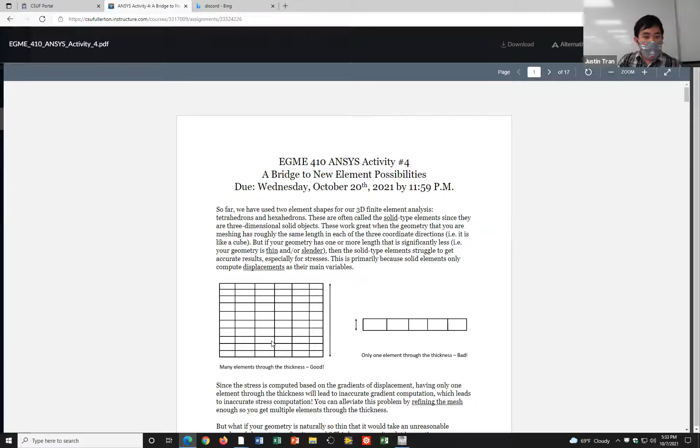Okay, so the activity today is called a bridge to new element possibilities. Basically we're going to take this CAD model right here, which I took straight from GrabCAD, so credit to that user for providing it. It's a perfect example for this activity because there are a lot of geometries here that we can turn into shells and beams. You'll see a lot of slender, thin geometries that will benefit from transforming into shells and beams. But it's also not the cleanest geometry in the world, so you'll see a lot of the extra cleanup operations that you typically have to do when working with shells and beams in practice.

If you haven't already, go ahead and open up Ansys and import the model. Remember, you right click on geometry, import, and then click on bridge.igs.

Contrary to our previous activities, instead of spending most of our time in Ansys Mechanical, we're actually going to be spending a lot more time today in Spaceclaim, which is the CAD software that comes along with Ansys. If you double click on geometry, even though there's a green check mark, it should open Spaceclaim by default. But just to make sure, I usually like to right click and then click on edit geometry in Spaceclaim. It takes a little bit of time to start up, so I'm going to go ahead and start that process now.

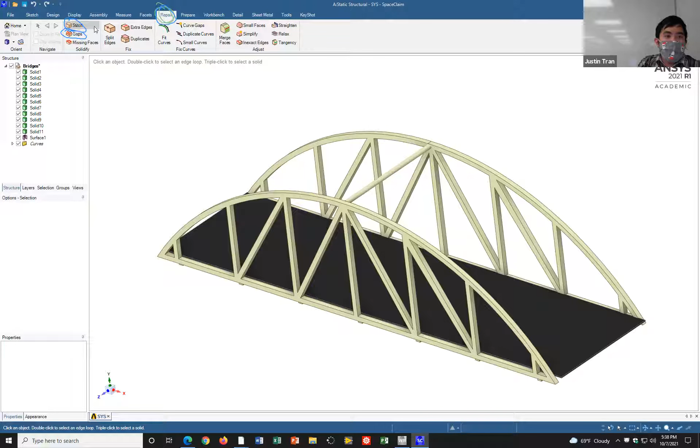After you click that button, Ansys is going to try to find some locations in the model where it can stitch things together. In this particular case, we have a notification that says no areas found. But if it did find some areas, this green check mark would light up. Right now it's grayed out because it couldn't find anything, but if it did find something, you would just click it, and Ansys would automatically fix those areas for you.

We're going to do the same thing with gaps. Let's go ahead and click on gaps. After you click gaps, you can see that Spaceclaim was able to find one area, highlighted in red. To fix that area, you can click on this green check mark, and usually that'll fix any gaps it finds in the model.

But for this particular model, and I haven't quite figured out why, it's here on this side but not on the other side. It can't actually fix this gap, at least not with the automated tools. We'll fix this later when we get into mechanical, but for now the automated system was not able to fix it. Normally when you click gaps and click OK, it'll fix some gaps for you, but for this particular case it doesn't work.

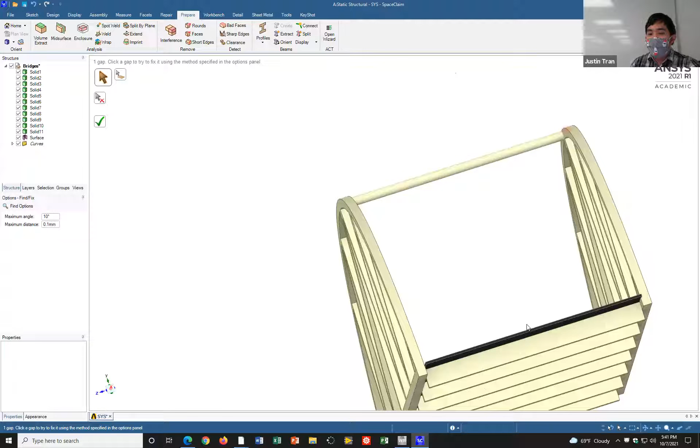That's a very clear, textbook place where we can insert a shell element. The other two places where we can put shells are on the sides of the bridge. If you look at the sides, we have this archway, but it's so thin in this dimension that it's going to be good to put a shell.

To create a shell, we're going to go to this tab right here called Prepare, at the very top of the screen. And then the tool for creating mid-surfaces is right here. For some reason it grays out when I'm outside the window. So I'm going to click on mid-surface.

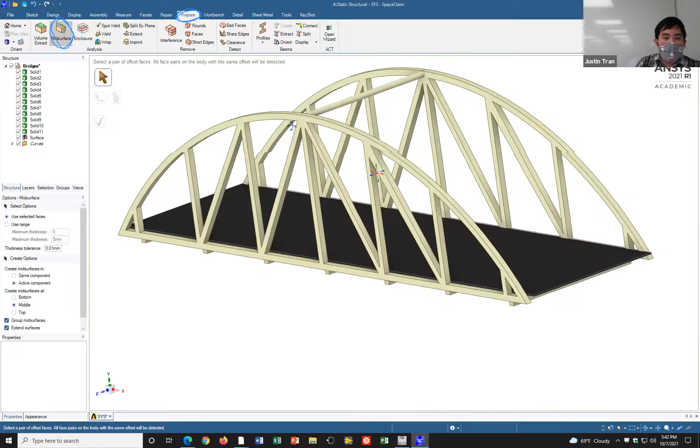The way it works is you simply just have to click both surfaces that are parallel to each other. Let me start with the side of the bridge. I'm going to click on this surface right here, and after you click that surface, you'll see that it kind of disappears. Then you're going to click on the other side, the parallel side. If both sides are sufficiently parallel and close enough, they'll be highlighted in blue and green.

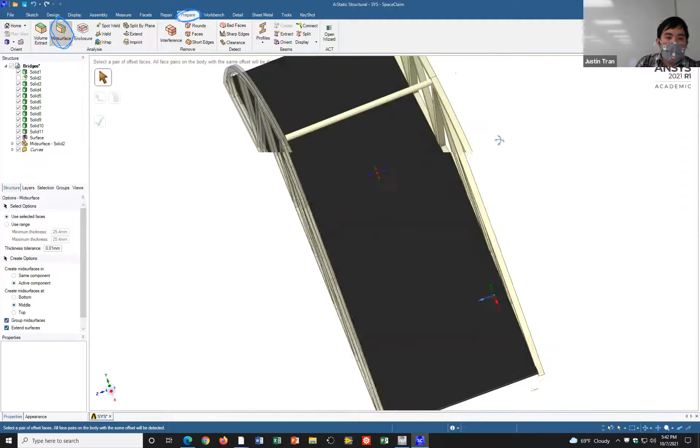Once you do that, you can go ahead and click on this green check mark, and then you can see that the mid-surface operation was created. The old three-dimensional object here is kind of grayed out now, kind of transparent, and in its place we have this thin shell geometry. If you want to get rid of the transparent ones, just click anywhere within the window, and now instead of that three-dimensional object, we have this paper-thin shell element.

So is everyone able to get a shell element from that side of the bridge? I'm not getting it to select—I'm clicking on it, but it's not working. Did you activate the mid-surface operator here? Let me check real quick.

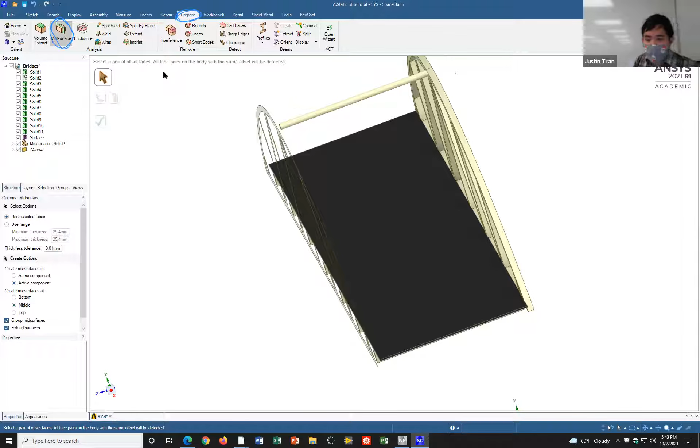For the rest of you, go ahead and create mid-surfaces for the other two. Go ahead and do it for the other side of the bridge and for the road as well. You should have three shells at the end of this.

You'll go and then you need to click the other side. No, the other side of the same surface. You click on the inner side here, and then you're going to click on the outer. Now that makes no sense. Yeah, I thought it was on either side. Yeah, because if you try to click those two, I think it says it's too far apart.

Yep, go ahead, check mark. Same thing, yep, the other side. Yep, thank you very much.

How would you deselect in case you accidentally select something? If you want to deselect, I think the easiest thing is just to choose a different tool up here. Go ahead and click like volume extract and then come back to mid surface, and then you can go ahead and click that again.

Yes, yes, do the road too. Yeah, so let me go ahead and do this really quick.

After creating your 3 shells, it should look like this. The nice thing is that after you create shells, it makes them transparent, and that helps to emphasize the fact that you have shells instead of solid parts.

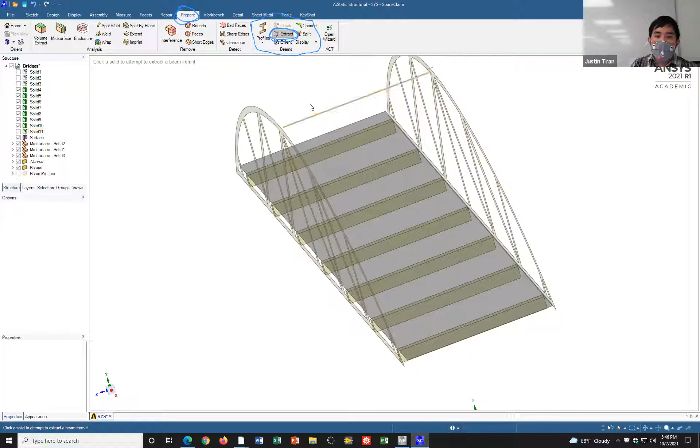I'm going to click on this Extract tool. The way this works is you simply point your mouse at a beam geometry, a slender geometry, and then click. Once you click, you can see it replaces the beam with a line. We're going to do that for the top supporting beam, and for all of the beams on the bottom as well.

I don't know why I'm lagging like crazy. All right, let's go ahead and extract all of these parts here. That actually made it lag less. And with that, we've successfully made shells and beams.

So, is everyone able to extract the beams from the different parts of the bridge? All right, looks good, right? Seems like we're done.

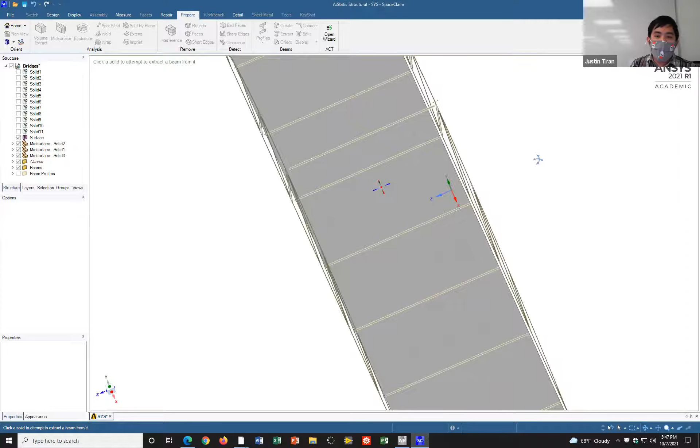Unfortunately, we're not. This is where things get more annoying than anything. If you zoom into the places where we extracted stuff, let's take this top beam for instance. I'm trying to get it to an angle which makes it more clear.

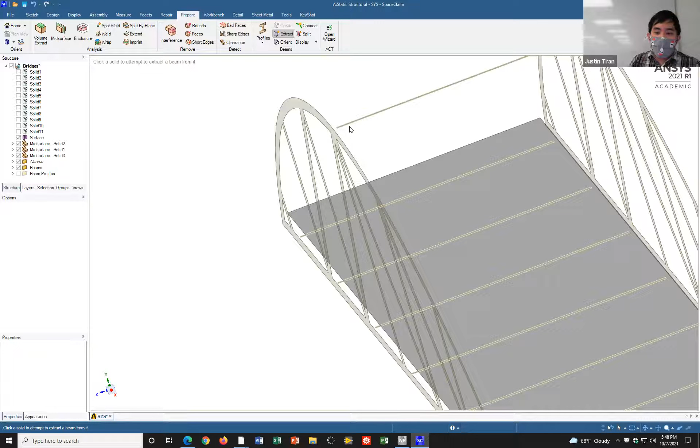This top beam's purpose is to support this top part of the bridge, to make sure it doesn't crumple in on itself. In order to do that, it has to successfully make contact with the bridge to support it. But you can see here, by doing our mid surface and beam extraction, we're no longer making contact here. We have this little gap where the beam should end and where the side of the bridge should be.

This isn't good, because if we take this into Ansys Mechanical right now and try to run a simulation, this beam is going to be floating in no man's land because it's not attached to anything—it's really just floating in the air. So we need to clean up this geometry to make sure that all the parts that should be connecting are still connecting.

If we went into Repair and clicked on Gaps, would it tell us those gaps are there? We're going to use a different tool for that, because Gaps is something that works strictly for 3-dimensional CAD models. This one is going to work for shells and beams instead.

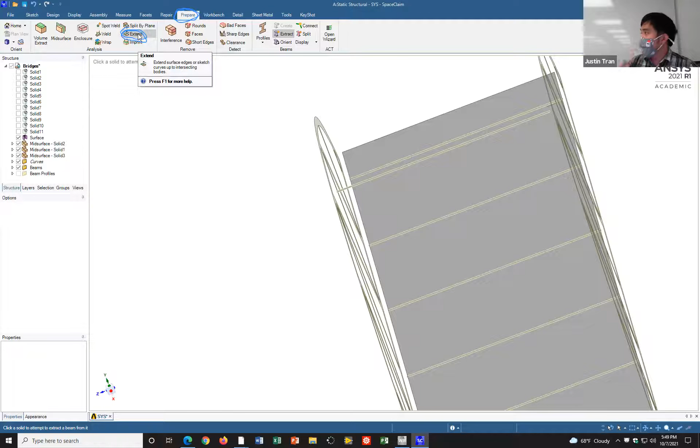The next tool we're going to use is within Prepare, and it's called Extend. It's the same concept, but instead of gaps, it's called Extend. If you read the tooltip for Extend, you can see this tool is going to extend surface edges or sketch curves up to intersecting bodies. This is going to help us alleviate those gaps.

So let's go ahead and click Extend. But unfortunately, after we click Extend, it didn't find any areas we can extend to. The reason is that right now, Ansys is only looking for gaps smaller than 10 millimeters. If you look at the left side of the screen, you can see the settings for the Extend tool. Unfortunately, the gaps we have here are actually bigger than 10 millimeters, so we need to increase that tolerance a bit. The tolerance I used for this activity was 50 millimeters.

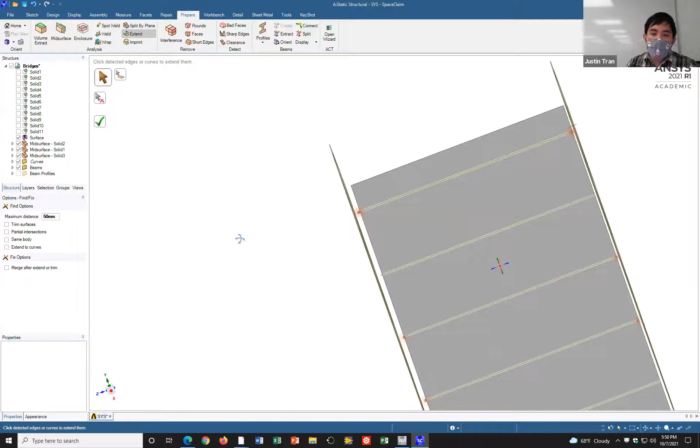After you change the tolerance to 50 millimeters, you can see that it's identified all these areas where the beams are not connecting where they should be. The nice thing about this is that you can just go ahead and click the green check mark, though you might have to click it a couple times. After you click it, you can see that it fixed not all of the beams, but some of them, making them intersect with the bridge as they should.

So is everyone able to extend the beams? Okay, that worked for some of the beams, but it didn't work for all of the beams. So just to make it a little bit easier to see, I'm going to hide the road for a second.

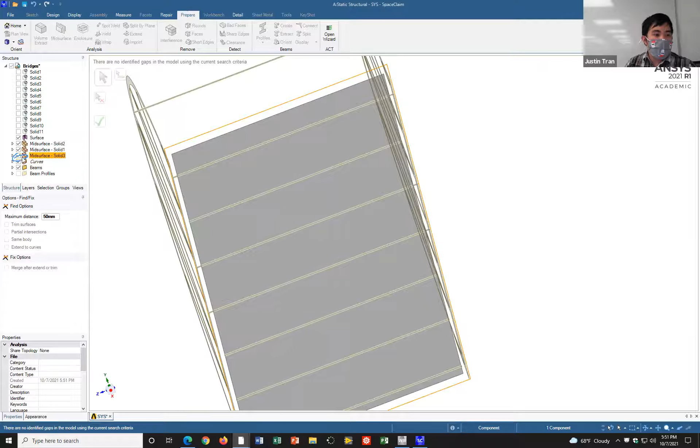If you did your shells in the same order as me, then your road should be solid 3. I'm just going to click on this check mark next to solid 3 right here, just to turn it off for now, because it'll make it easier to see. The road's still there, I just hid it from view so we can see this better.

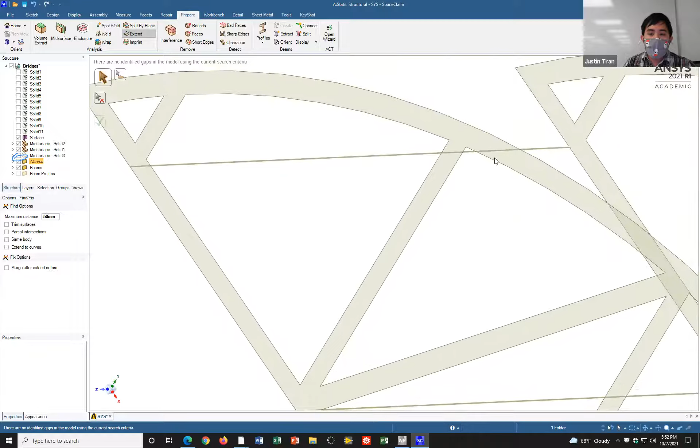Let's go ahead and look at some of the beams on the bottom, and see which ones are connecting or not. If we look at this beam right here up top, you can see that it was successfully extended to hit the bridge. But this beam was not.

If you look at this beam right here, we have a little bit of a gap between the beam and the bridge. This was not able to successfully extend, and you might be wondering why, because it looks like it should be the same as the other ones.

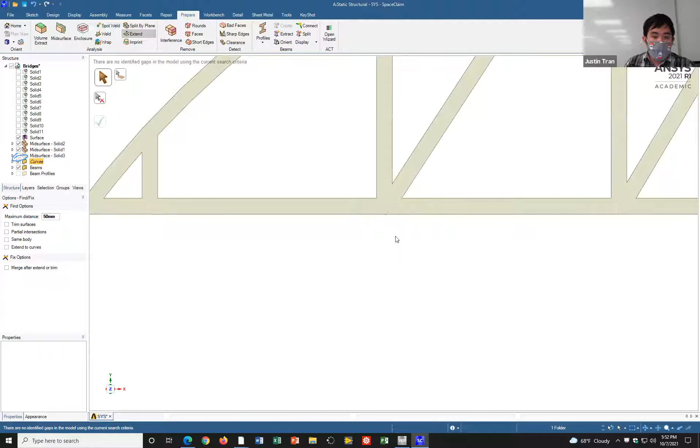The reason it couldn't extend is that it's not even within the plane of the bridge to begin with. I think that's easiest to see if you go down to the XY axes here and click on Z, the blue one. It'll kind of flip me around, but okay.

If we look at this beam right here and zoom in as much as possible, you can see that this beam is actually underneath the bridge. There's a vertical gap between these two points right here. So when we asked Ansys to extend these beams, it tried to extend as far as it could in this direction, but it wasn't able to find any intersecting solid, so it just did nothing. But that's not good, because we still need this to intersect with this. We need to clean this up a little bit more.

The way we're going to do that is we're going to start—let me zoom out a bit because I'm going crazy—we're going to move it vertically upwards, in the vertical Y direction, just enough so that it's within the plane of the bridge. Then we're going to use the extend tool again in order to fully extend this to the sides of the bridge.

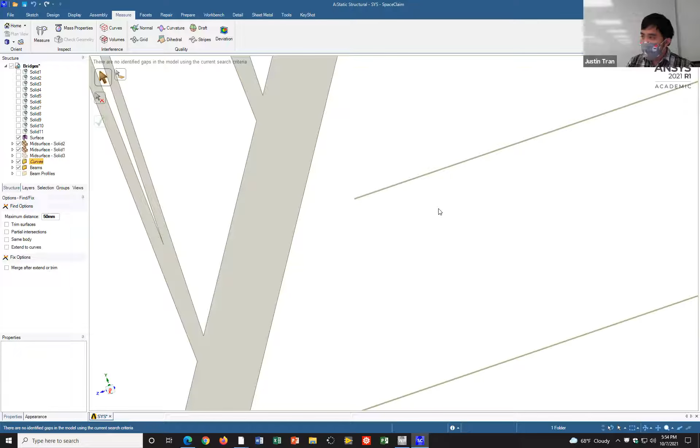Are there any questions on that? Does that make sense why we weren't able to extend this beam down here? Quick question—are you saying that it's not connected to the lower part of the side, the beams on the side? Yeah, yeah, that whole display. Yeah, and so the problem is that it's actually below it.

Let me do this on Z again. The problem with this, and the reason why we couldn't extend this to the side of the bridge, is that it's not even in line with the bridge edge itself. So what we need to do is move this beam upwards in the Y direction such that it is actually in line with the bridge, and then we can successfully extend it.

All right, so this part is actually going to take place in a few different steps. The first thing we need to do is measure how far off the beam is from the edge. We're going to need to do this individually for all 4 of the beams that are still not connected yet, because when we measure them, you'll see that the amount they're off is different.

Remember when I told you that this CAD model wasn't the cleanest thing in the world? This is the reason for it. So first we're going to measure the vertical Y distance that we're off, and then after we measure that, we're going to move this beam upwards by basically the exact amount.

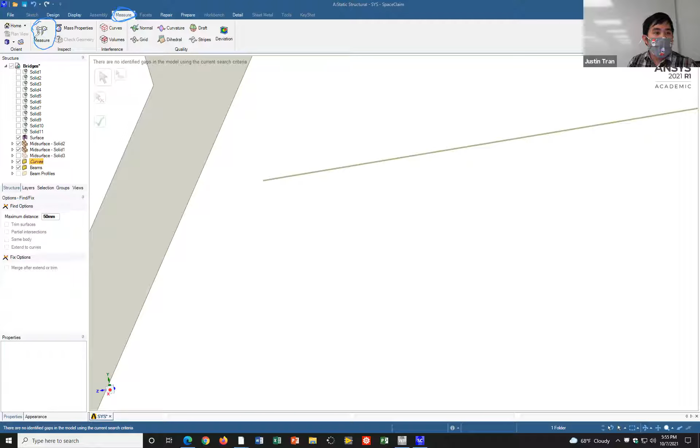We're going to go into the measure tool right here. This tool is going to let us measure different parts of the geometry. Specifically, you're going to click on this tool called measure. After you click on measure, the options menu on the left is going to change. One thing you need to make sure of is that the option for show XYZ vectors is enabled, because all we want is the vertical Y distance between the beam and the bottom of the bridge.

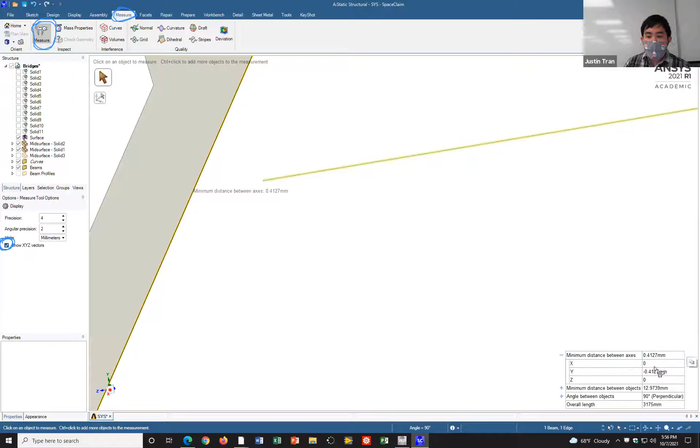The way this is going to work is we're going to first click on the beam itself. You can see the length of the beam, and then you're going to hold Control on your keyboard, and then click on the bottom edge of the bridge. If you do that right, you should see this window pop up, which shows the Y distance between the beam and the bottom of the bridge.

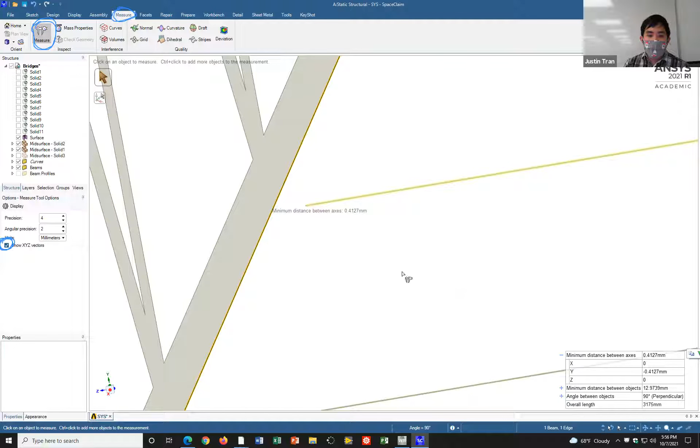For this particular beam that I selected, the distance between the two is 0.4127 millimeters. If you guys chose a different beam to look at, your distance might be different, but the one that I ended up picking was 0.4127.

So was everyone able to measure that distance? Okay.

Now that we have this number, let's go ahead and write it down. I have the gift of Zoom, so I'm going to go ahead and just write it on the screen. But you can use your notebooks or whatever — just don't Sharpie onto your computer screens.

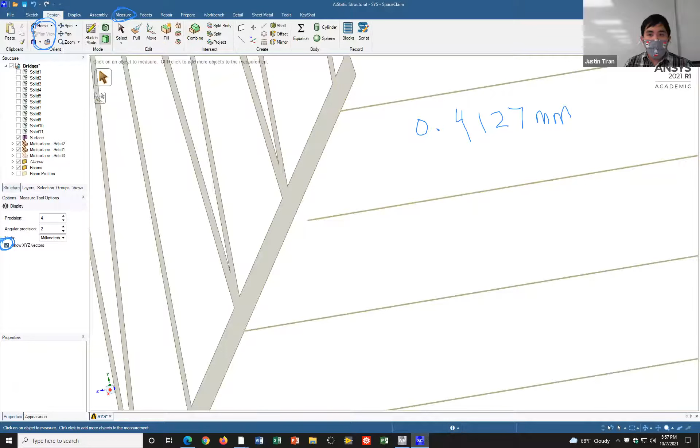All right, so I'm going to click away just to make sure we're deselected. From here we're going to go to design — actually, let me clear these first. Okay, we're going to go to design up here.

Okay, so we're going to click on move right here. If you read the tooltip for move, this basically lets you select an object and you can move it or translate it in X, Y, Z in space. So with the move tool selected, we're going to click on the beam.

After you click on the beam, you'll see several arrows and rotation tools show up. You're going to want to click on the blue arrow — make sure you're clicking on the blue arrowhead. After you click that, you can click and drag, and you can see that you can move the beam up and down.

It's really hard to click and drag this to the exact number that you want. So what I do is I just click and drag it up a little bit, just to get this number thing to show up, and then I manually input the amount that I want to move it up by.

And so it helps a little bit to round up, because we basically want to move this up enough until it intersects with the bridge. Okay, all right.

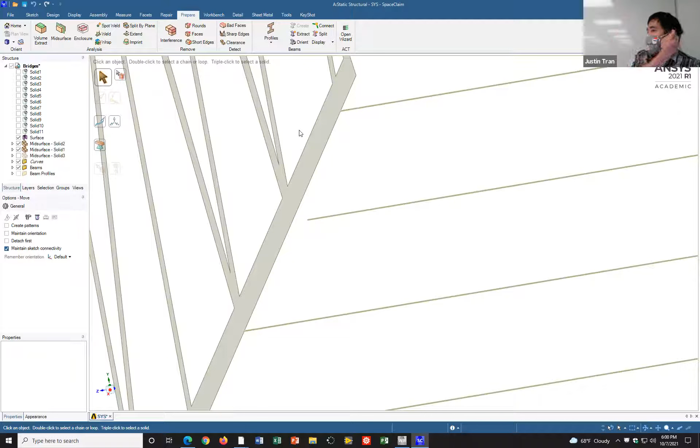All right, so was everyone able to move the beam up by that amount? All right, I'm gonna do one more step, and then I'm gonna go walk around a little bit, because I think this is the part where I usually start to lose people.

Okay, and so now that we've moved the beam upwards, we can go ahead and extend it now. If you go back to the Prepare tab, and then go to Extend right here. Remember before when we clicked this, it wasn't able to fix this beam because it couldn't extend it and couldn't hit the bridge from the side. But now you'll see that when you click Extend, it found two areas, right? And those two areas are on the beam that we just moved up. So we go ahead and click OK.

And so now our beam is successfully intersecting with the bridge. Okay.

Yeah, so the amount that you measure depends on which beam you selected. One of the beams I know is 1.9221 millimeters down, so I think you just selected a different one than I did, and that's totally fine. So you want to move that beam upwards 1.9221. Yeah, so all the beams that are off right now are off by a different amount, so make sure you're measuring for each of these beams, okay?

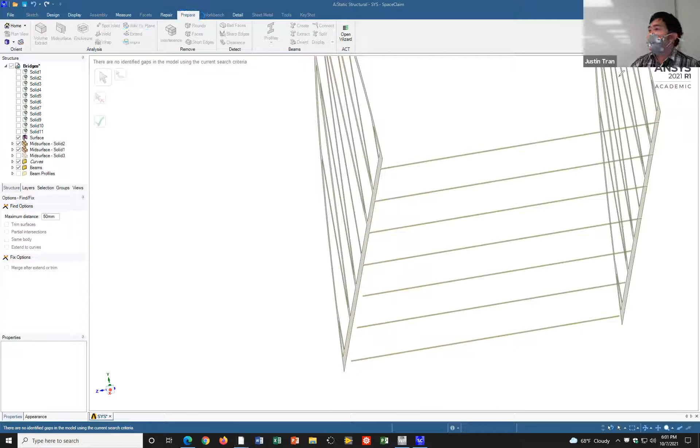I tried it, but it's not extending, so there's nothing to extend still. Okay, so let's go from the beginning, let's go to measure. Oh it looks, yeah, all right, let's measure that one just to make sure. Let's go ahead and measure.

Oh, it's not — oh, there. You have to hold control. Oh, it's so close. You see, moved up just a smidge more.

But be careful here, because you're selecting both, so go ahead and click out for a second, and now try to make sure you're selecting the entire beam. I had issues yesterday where people had both the beam and the bridge selected, and they moved both at the same time. That's that thing I was just doing right there.

How do I do that? You can go ahead and hit the undo button here.

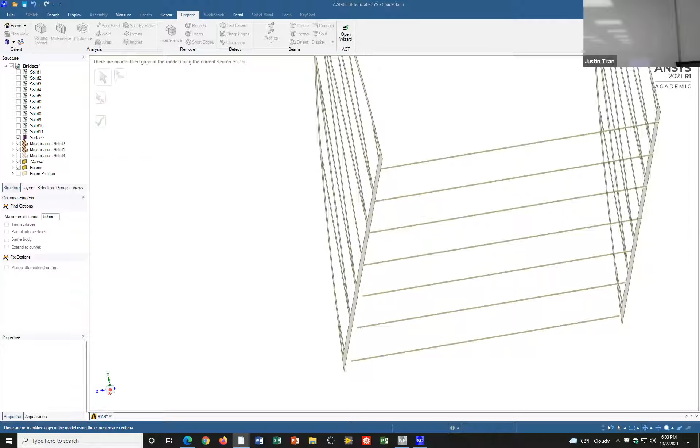Yeah, so the floor, I just hid it for now, so I clicked on this check mark here. We'll deal with the road in a bit, but for now I just want everyone to make sure all the beams are connecting to the bridge.

Did you hit the extend tool? Like they're not exactly at the bottom. Oh, that's that, it should be. Go ahead and rotate it. Yeah, so that one we have to move up for.

Can you see? Let me try doing that and extend. Okay, so it extended everything, so those ones that are inside it should be connected.

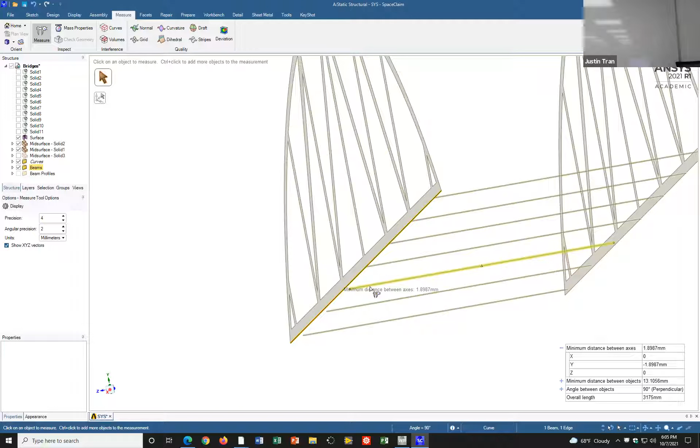Okay, this one — there should be 4 of them on the bottom, that one, and then 3 on the end. Oh nice, yeah, control 8, that's good.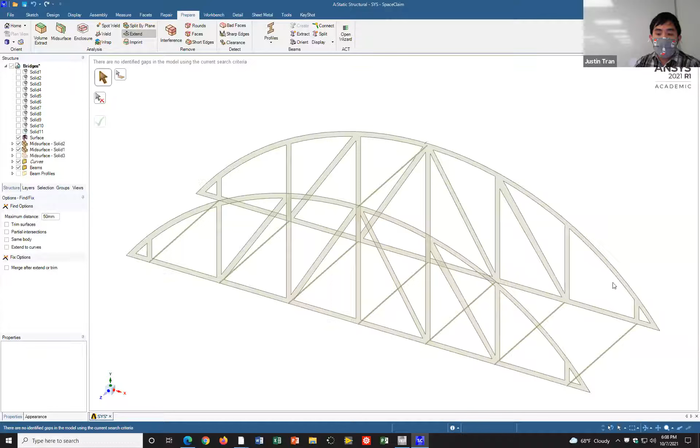The part we're going to do next together is basically the same thing for the road. We need to move the road down a little bit to make sure it's in line with the bottom of the bridge, using the same measure operations as before, and then do an extend to make sure they make contact. Go ahead and start working on that if you've extended the beams.

Does it matter how high up you move the beams? You want them to all be pretty close, because the next step once we get into mechanical is we're going to bond the road to all of the beams on the bottom. If they're not level with each other, it might not bond successfully, so you want them all pretty close. I don't know the exact tolerance within Ansys, but they should be within at least 1 decimal, like 0.1 millimeter, I'd say.

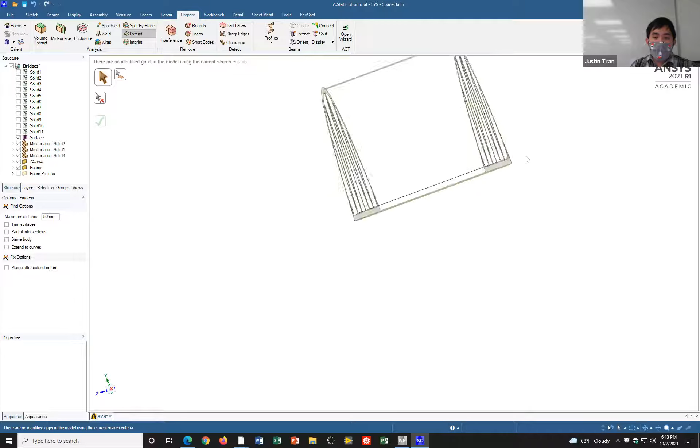Just like we did with the beams, we need to measure the vertical distance between the road and the beams. So we're going to go back to measure, and make sure you have show XYZ vectors enabled. I'm going to click on the road.

Then I'm going to hold control on my keyboard just like I did for the beams, and click on, in my case, the bottom edge of the bridge, because that's what we want to line it up with. You can see here that the y distance we need to travel is about 28.37 — that's the vertical distance between them.

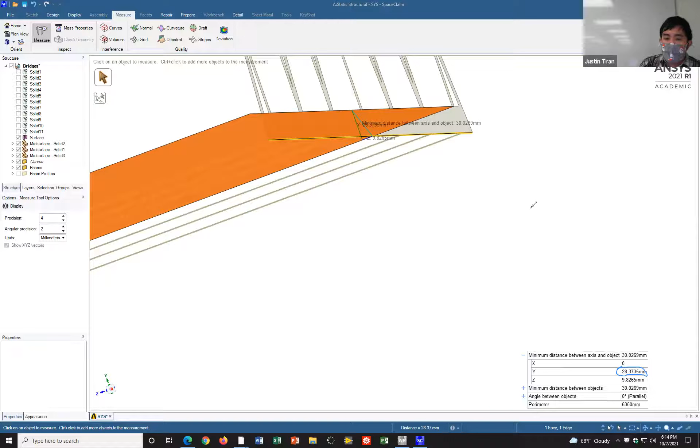We're going to move this road downwards by this amount, but this time we're going to stop a little bit short and round this one down. Because if we move the road too far down, say 28.38, then the road is going to be suddenly underneath the bridge, which is not what we want. So in this case, I'm only going to move it down 28.37.

All right, let's go back into design here. Go ahead and click move. I'm going to click this entire road, and I'm going to move this downwards.

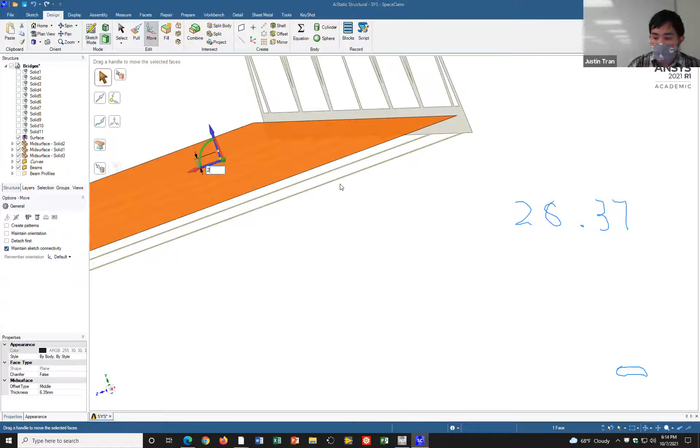I'm going to manually input the number, so 28.37, okay? And if you're doing that, you can see that the road is now basically right on top of all the beams. And then one last thing before we exit Spaceclaim is we want to extend, because right now we can see there's this gap between the road and the bridge.

But the road and the bridge should also be connected to each other. So we're going to go back to prepare, and then I'm going to click on extend. You can see now that I've clicked extend, there are two new areas that Spaceclaim wants to extend, which are the sides of the road. So I'm going to go ahead and click OK, and after I click OK, you can see the road has been extended.

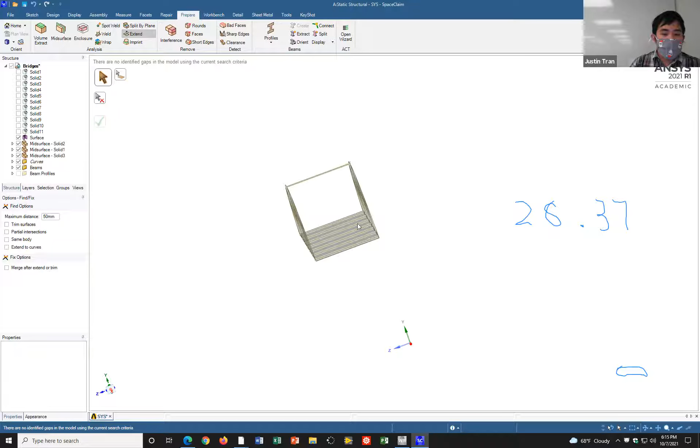So now everything is touching that should be touching. We have all the beams touching the sides of the bridge, the road is on top of all the supporting beams, and the road itself is connected with the side of the bridge as well. So by the end of the Spaceclaim part, you should have your shell and beam bridge looking something like this.

So were some people able to get to this point where you have the road kind of extended outwards? Doesn't matter if the road is like in between those bottom beams, midway. Because especially for the beams that we didn't move up ourselves, those are kind of upwards a little bit, and so there's going to be a little bit of play between them, but they just have to be close enough. The next step is we're basically going to be bonding those surfaces together, so at this point they're all going to be close enough such that they do that.

The road only acknowledges one point. Did you move down the entire road, or did you move down just one edge of the road? You want to make sure. Oh, and you might have accidentally moved up the bridge too, or moved down the bridge. If you did that, I would recommend that you hit the undo button here, because the move thing, once you've kind of gotten rid of it, it's kind of hard to track what you're doing. So I would hit undo until you get to a stable point, and then try to do the instructions over again.

All right, okay, so I'm going to go ahead and close out of Spaceclaim for now, and then we're going to open up Ansys Mechanical. But if you're still working on the Spaceclaim stuff, don't worry, I'll come back around to you.

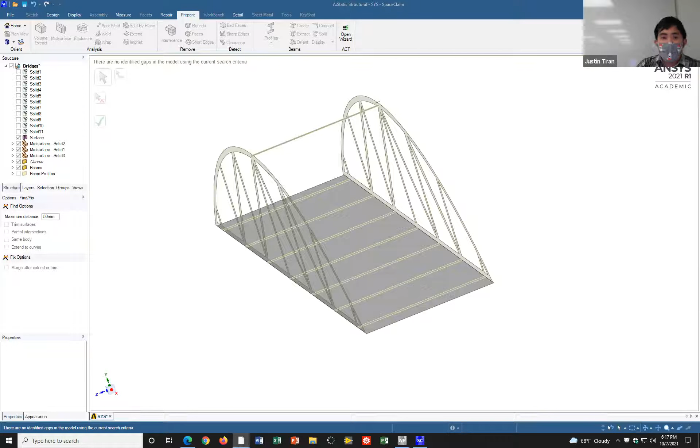But the next step is a little bit confusing, and I realized in the document I've hardly placed any images for this, so this is the part I want to make sure I go over today. Even if you don't see it, even if you can't follow along live, then you'll have the video to kind of help you out, because it is a little bit confusing.

All right, so I'm going to go ahead and close Spaceclaim. I said close Spaceclaim, okay, thank you. Okay, and then now I'm going to go back to Workbench, and I'm going to double click on Model. This is going to bring up Ansys Mechanical, which is where we're going to apply the meshing and the boundary conditions.

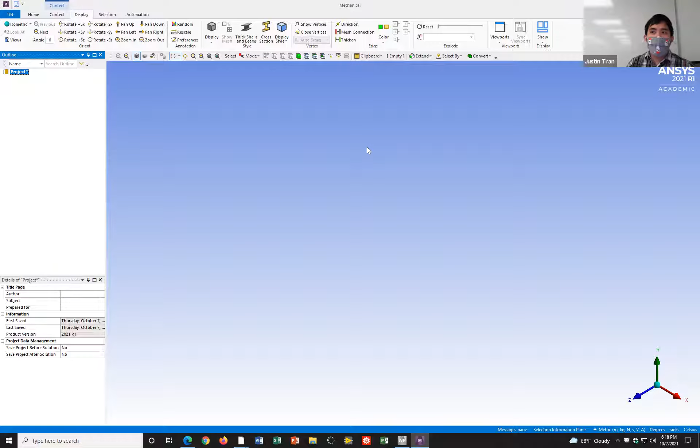Hey, Professor? Could you have all this open ahead of time and then edit one or edit the other, or do you have to open it fresh? I think it's best to open it fresh, because when you open up a new program, that's when it loads data from upstream. I don't think they update each other in real time. And if they did, I think it would slow down your computer pretty massively too, because it's trying to run so many programs at the same time. I've never tried it though, so if you want to try it and let me know how it goes, then. But that's kind of just how I understood it from before. Oh, I see.

Okay, all right, and so here we are in Ansys Mechanical, and so this is the interface that we've used before.

Okay, so first thing we're going to do is get rid of this weird twig chopstick thing that I still don't know what this is. If you look at the geometry subtree here, you can see it's the only part with a question mark. So we're just going to suppress it, because we don't need it in this simulation. Let's right click this and hit suppress. Okay, and then now our geometry is happy.

All right, and so from here you can see that we have quite a few parts in this assembly, way more than our signposts from before. We have 3 shells here and then 8 beams.

Which part did you suppress again? This one called sys/surface, yeah, it should be the only one with the question mark next to it.

Right, and so we have 11 different parts of the geometry, which is a lot. Okay, and so usually at this point you can start to go into mesh and apply your boundary conditions. Okay, but we have one problem here.

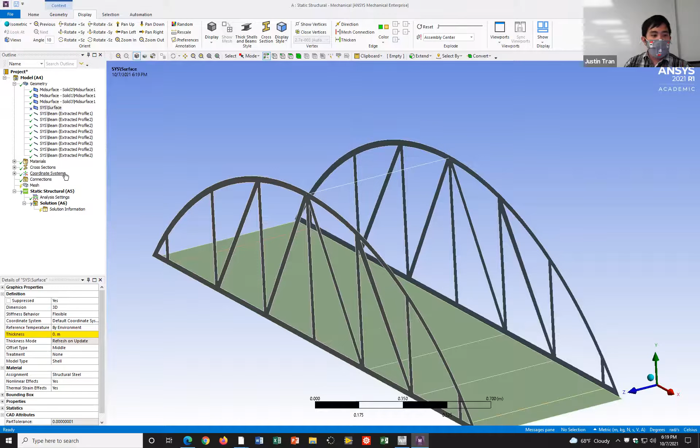The problem is with the connections. Normally when you have a multi-part assembly like this, Ansys should be able to create the connections that determine how the parts interact with each other. The unfortunate thing is, because we modified this geometry quite a bit by turning it into shells and beams, none of the connections here were auto-generated. So we basically need to define these connections ourselves, which is what I'm going to spend probably the next 10 minutes doing.

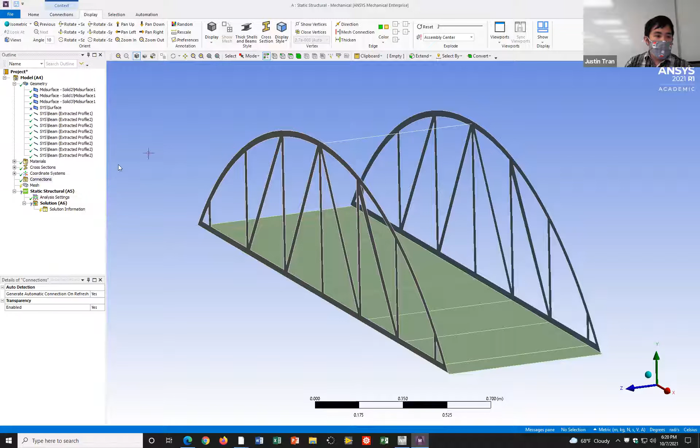Okay, so go ahead and right-click on connections, then go to Insert, and click on Manual Contact Region. What this will do is have you select two different geometry types, or two different parts of the assembly that you want to bond together. One of them is called the target, and the other one is called the contact.

All right, so let's think about which parts of this geometry should be bonded together. First thing we should note is that the sides of the bridge, this side right here, should be bonded or welded with all the beams that are connecting to it. So we need to make sure we define that region. Let's go ahead and do that first.

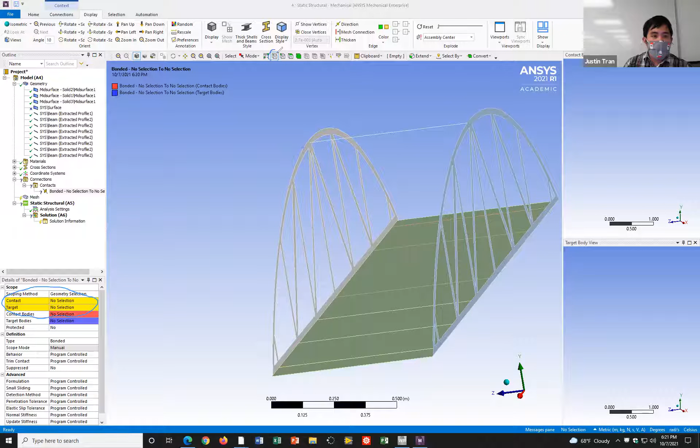I'm going to go ahead and select all 8 sides of the beams. You want to make sure you're in vertex selection mode right here. With that selected, we're going to select all the sides of the beam, mousing over each part until they turn green, and making sure you're holding down Control on your keyboard so you can select multiple at the same time.

In the end, you should have 8 of these selected, 1 on top and 7 on the bottom. With all 8 selected, you're going to go to the bottom left of the screen, go to Contact, and hit Apply right here. By clicking Apply, you're specifying that part of the contact. And so that defines that contact.

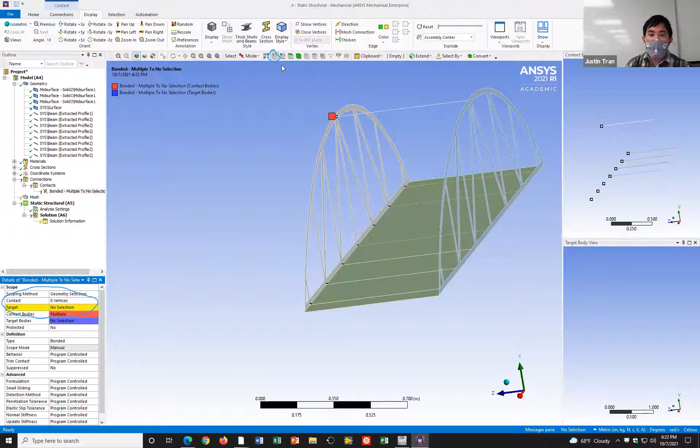Now we need to define what part of the assembly these beams should be connecting to. For this model, they're going to be connecting to this side of the bridge. This side of the bridge here is a surface, so you want to make sure you have the face selecting mode highlighted. Then you're going to click on the target and hit Apply, and that defines that contact region just like that.

Can you say that again?

For the target, make sure you're in face selecting mode. Click on the side of the bridge they're going to be connected to. Once that's selected in green, go down to target in the details menu, click on it, and hit Apply. Once applied, this contact is fully specified. This contact says that these 8 vertices, or parts of the beam, are going to be bonded together with this side of the bridge.

Was everyone able to bond those two things together? Okay, let's do the same thing on the other side. Let's right click on contacts here and insert another manual contact region.

Question from the chat: how do we know if it was successful? If it was successful, if you look at the bonded support you just made, there should be a green check mark, meaning it's fully specified. If you look at the two windows on the side, that'll show the two regions you're bonding together. On one window you should see your 8 beams, and in particular the ends of the beams will be highlighted with a white square. In the other window, you'll see the part it's bonded to, which is the side of the bridge.

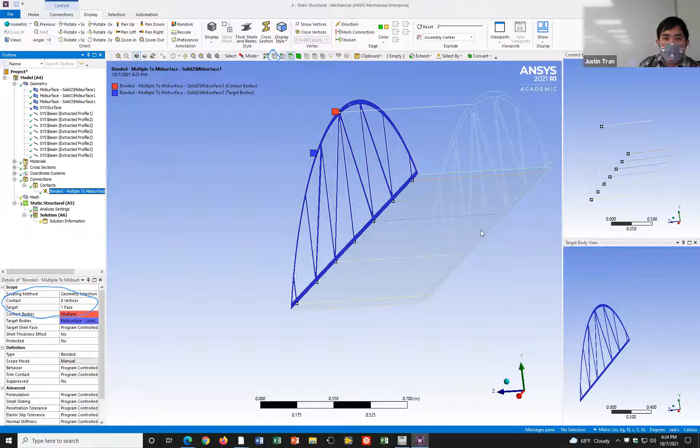Does it make any difference which one we choose as target and which as contact? It does, actually. The explanation is a bit too long for this class, but basically the logic is that the target should be the bigger face. Whichever one is bigger between the two things you're bonding together should be the target, and the smaller one should be the contact. In this case, since the side of the bridge is much bigger, you want to choose that as the target, and since the other thing is just a bunch of vertices, you'll choose that as the contact. So it does matter — if you pick them in reverse order, Ansys won't be happy and will say it doesn't know what to do.

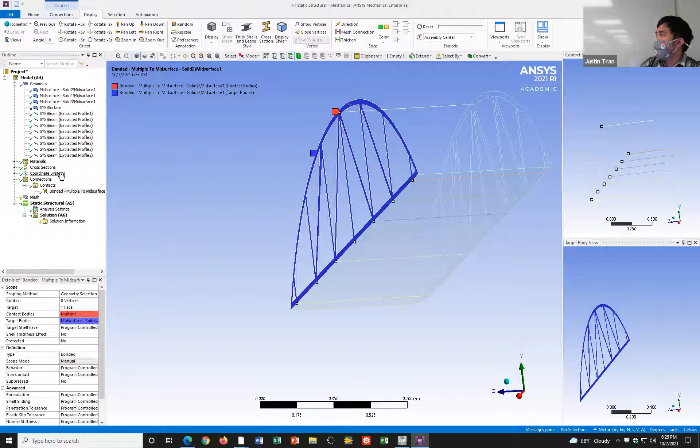Quick question — I noticed in SpaceClaim, in that same section where extend was, there was one called welding. Would that have helped the contacts or connections here? I'm not sure, I haven't experimented with that feature yet, so it might. This is just how I've learned it in the past, but maybe that welding tool will improve the contacts.

You're highlighting the outer face. The nice thing about shells is that there's only one side — it looks like there are two sides, but remember it's a 2D thing now, so if you select one side, it's going to select the other side as well.

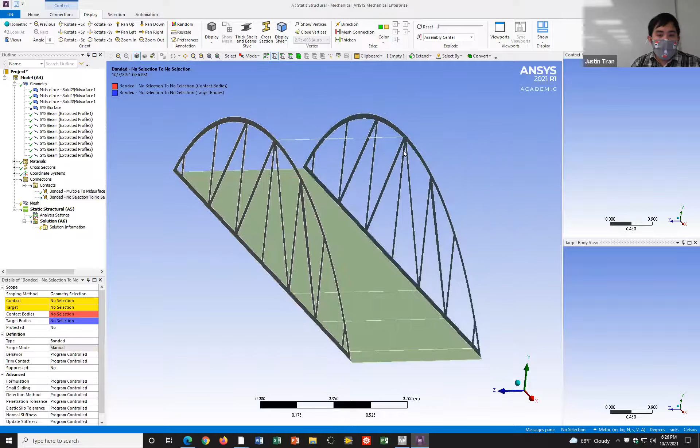Let me go ahead and do the rest of it since we're running a little short on time, and I'll double back with everyone else. We're going to do the same thing on the other side — just like before, I'll select all these 8 vertices and select the other side of the bridge, then hit Apply. That's our next contact region.

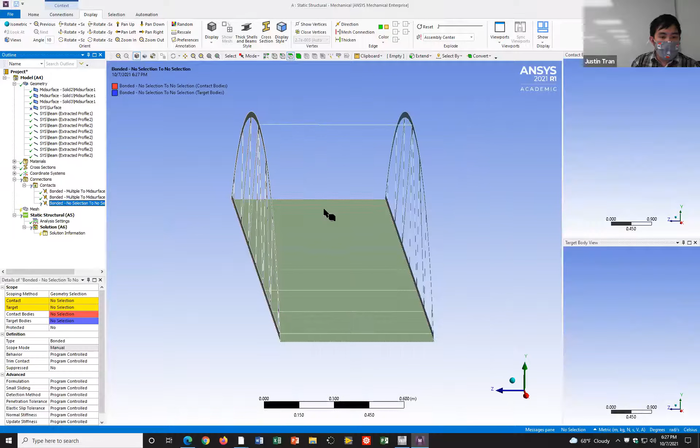We have 3 more contacts to define. We need to make sure the road is connected to all the beams. I'm going to insert another manual contact region and select the road. Since that's the bigger surface, I'll specify that as the target. I want to make sure the road is fused with all the supporting beams, so I'll switch to edge selecting mode and select the 7 beams on the bottom. For the road, it shows the whole body — yes, mm-hmm.

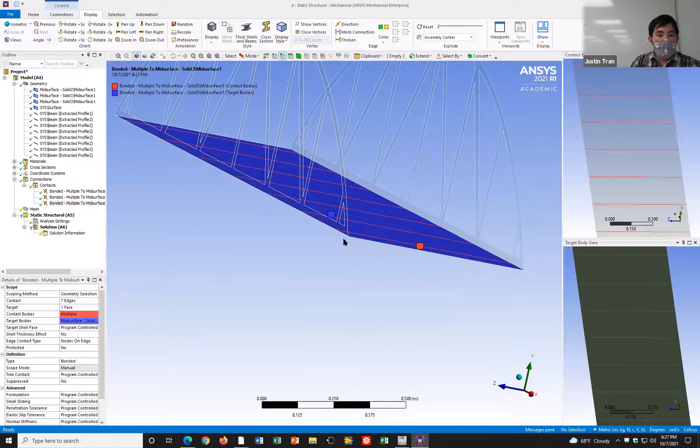Okay, so the road is now bonded together with the beams on the bottom. We have 2 more that we need to do. We need to make sure that the road is bonded with the side of the bridge.

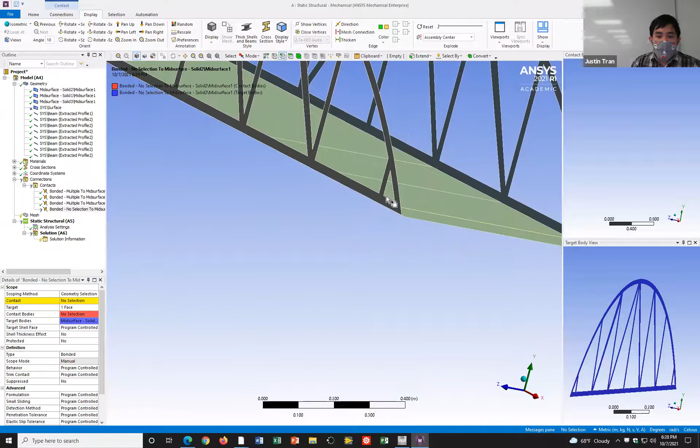So I'm going to go ahead and insert another manual contact region. I'm going to select the side of the bridge, and that's going to be our target. For the contact, you have to be a little careful here because we lined up the road with the bottom edge of the bridge so well that it can be hard to select the edge of just the road itself.

So what I usually do is notice that from the geometry, one side of the road is actually hanging over the bridge by a little bit. So you want to go onto this side and click on just this region of the road right here. We're going to go ahead and hit apply.

And then we're going to do the same on the other side. So we're going to right click, insert manual contact, and select this side of the road again. Then I'm going to select the side of the bridge that it connects to.

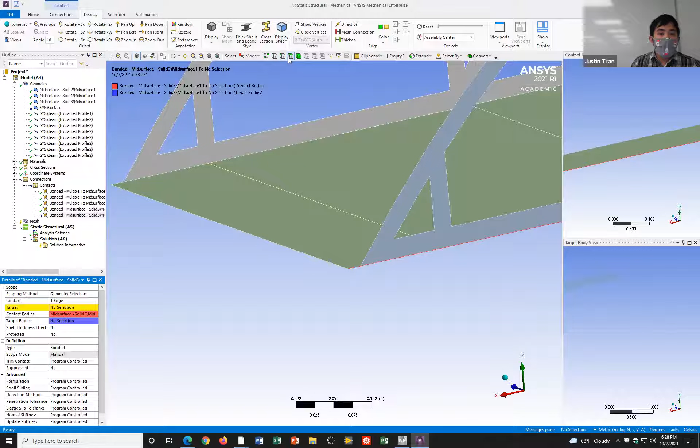In the end, you should have 5 different contact regions: 2 for the left side of the bridge — 1 that connects the beams to the left side, and 1 that connects the road to the left side. 2 on the right side of the bridge — 1 that connects the beams to the right side, and 1 that connects the road to the right side. And then 1 other contact region that connects the road to all the beams on the bottom.

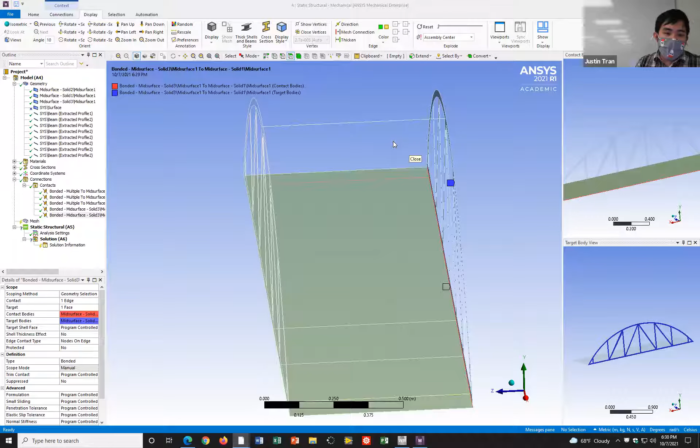Yeah, Chris, I'll double back with you after class, but I want to make sure we get past this part for the rest of the class. So the selection can be kind of annoying too, and that's usually where I lose people.

For the side of the road, did you choose the target to be the side columns or the side? The side of the bridge. I chose that to be the target because it's bigger than the edge. We should have 5 bonded sections. If you did all the contacts, you should have 5 bonded sections here.

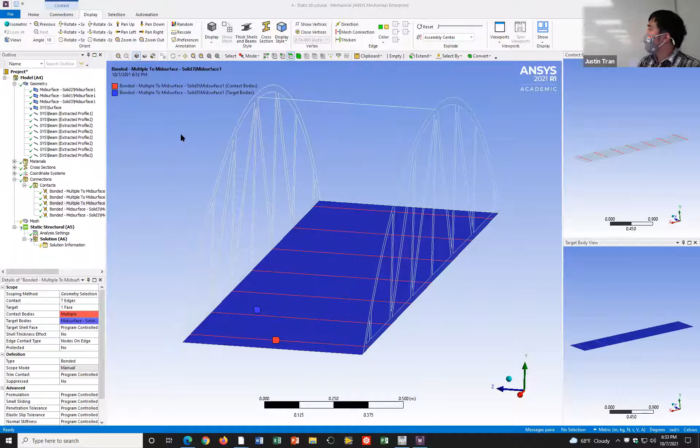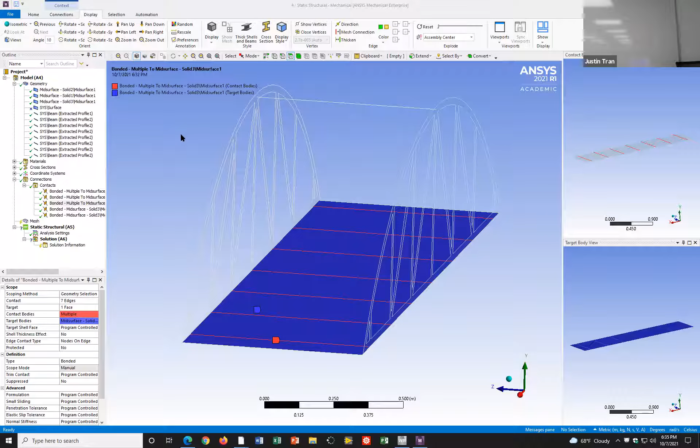When you do the road to the side of the bridge, what's your target and contact? The target's going to be the side of the bridge, because that's the entire surface, and the contact should just be the edge of the road. Okay, got you. Thank you.

So we have 10 minutes left, and I want to make sure I give a preview of the rest of the assignment. If you're still working on the contacts or still in SpaceClaim, just watch for the next 10 minutes. I'll stick around after class, maybe until a little after 7, to help people out. But I want to make sure I show this stuff to you. From here, it's a pretty standard finite element analysis.

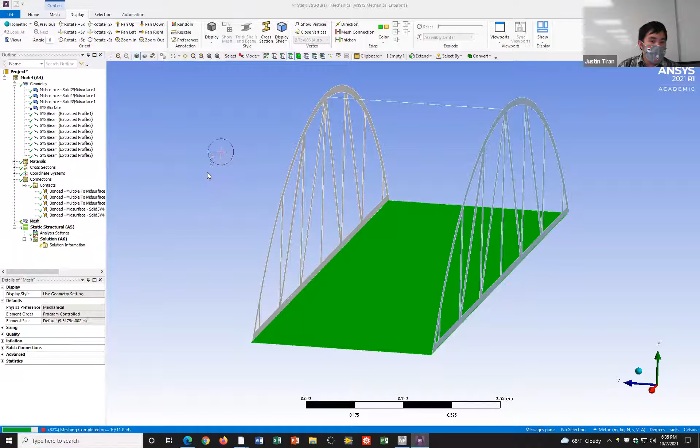We're going to put a mesh on this. But I want to show you something with the mesh, because this next part kind of panics people. If you're running with the default settings in Ansys right now, after you mesh, you might get something that looks like this. Most people panic and say, I thought I changed this to shells and beams, so why is it making all this blocky stuff? I thought we wanted to get rid of this. There's a setting for this.

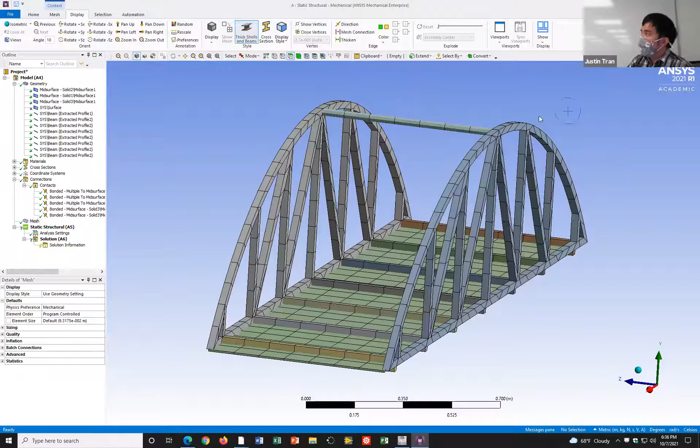If you go up to display, you can see there's a setting called thick shells and beams. It's just a rendering thing Ansys does to make it seem like you have thicker elements than you actually have. The reason it has this setting is that often for this model we converted everything to shells and beams, but for other geometries you might only convert part of the geometry. This makes the mesh look consistent with the other parts of the model, but they're actually shell and beam elements. You just have to turn off this option.

All right, so the next part after that is applying boundary conditions. I've basically told you to constrain the bridge in 2 locations - one on one side of the bridge and the other on the other side. Those are your constraints. Then you have to apply some kind of loading. I'm going to leave it up to you guys to decide what kind of load you want to put. There's a lot of options here.

But if you want to recreate my results, what I did was put basically a constant pressure on top of the road. I don't remember the magnitude I put on it, just because I created this activity a long time ago and wasn't able to recreate these numbers. But these results should give you a sense of what you can expect from the visuals of the results.

Okay, so if you want to recreate these same visual patterns, the way I did this was I just put a constant pressure on top.

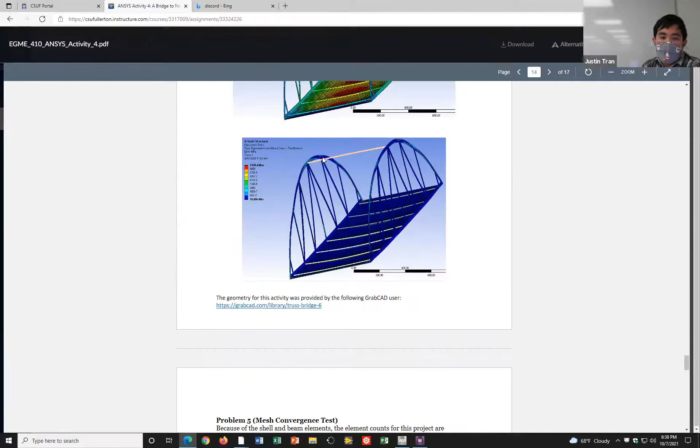Problem 4 here is analysis results, and so you're going to basically show the screenshots as you typically do. Your results might be different than mine if you chose different boundary conditions, but here are some references for you, just because I know this was a long activity and there's a lot going on. I wanted to give you a reference point for what the solution should look like.

All right, problem 5. For problem 5, I'm going to make this one optional for this class just because I'm making my grad students do this, but for you guys, it's optional.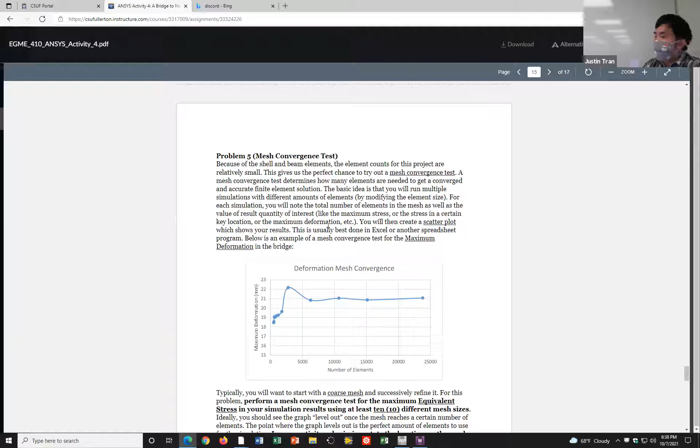Problem 5 is something called a mesh convergence test. A mesh convergence test is basically a way to measure how accurate your mesh is. The way it works is that you're going to run your simulation with the same boundary conditions - that part's really important. With the same boundary conditions, you're going to run several different simulations with different mesh densities.

Usually you start with a coarse mesh - a mesh with a relatively few number of elements with a large size. Then you successively refine that mesh, making the mesh size smaller and smaller. Throughout that period, you should see your solution change, because as you change your mesh, your solution is getting more accurate.

After a certain point, your solution should not really be changing all that much, and you reach the state of convergence. This is kind of the goal for every single mesh, that you reach the point where further improvements of the mesh are not going to make any difference.

For this assignment, if you want to get 10 points extra credit, you can do a mesh convergence test, and you're going to need to do it with at least 10 different mesh sizes. What I'm showing you here is a mesh convergence test for the deformation, but for this problem, I want you to do it with the equivalent stress.

So you're going to run 10 different simulations with 10 different mesh sizes, and then track what the maximum equivalent stress is for each of those simulations, and plot it in Excel. What you should see is that eventually, once you reach a certain point, your convergence graph should level out just like this.

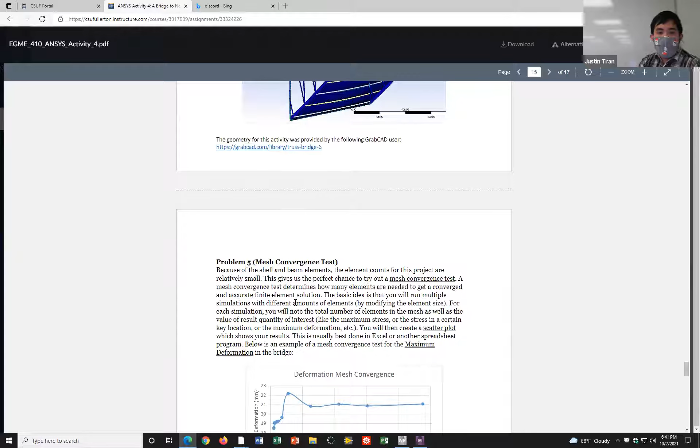All right, any final questions on the activity before I go around and help catch people up? Yeah, quick question.

By doing the shells and beams, since we're moving around the different elements, are we changing the geometry of our actual solid? That's a great question.

And so technically you are, because we are moving stuff around, we are changing the geometry. But it's kind of a necessary evil that we need to do in order to make it work with shells and beams. Ideally, when you modify the geometry, it shouldn't be too much, and the goal with the modifications is to try to make it consistent with how the original geometry was. Because just naturally by doing shells and beams, you're going to be making things thinner and making things not connect. So all the modifications we did today were to make sure things still connected as they should. But things are moving around, and that does change the geometry, so that's definitely something good to keep in mind.

Any other questions? Okay, that's the end of the activity. If you're still working on some of the other parts, just let me know. I can stick around till about 7 today, and maybe a little bit after that. I want to make sure I get as many people past the connections part as possible. But if you're past the connections part and already running simulations, I think you're in great shape for the rest of the activity.

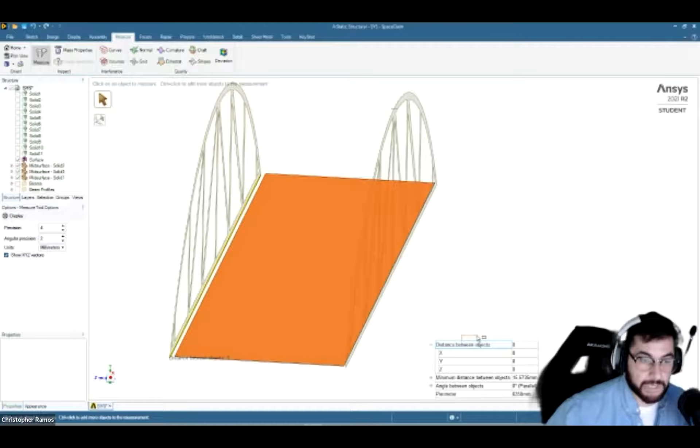Oh, it's all zeros. Okay, so let's go to prepare again, and then extend. Is that 50? I can't tell on the left side. Oh, it's not, it's at 10. Okay, oh my God, yeah, let's try this now. That's gotta be it then. All right, hit enter.

I think you have to hit enter on the 50 mil. Yeah, I did. Let me still try it—nothing, huh? Maybe 100? Yeah, you can try it. Still nothing, huh? That is odd. That's really weird. Oh, strange.

Can you hit some undos, and let's get to the point before you moved the road down to begin with. Let's keep hitting undo. I want to get to the point before the road was moved down. Okay, that's all my undos. I had to close it. Oh, okay, yeah, I see. I can try before I attempted that big move from before. Yeah, if you can get to that point, that'd be good.

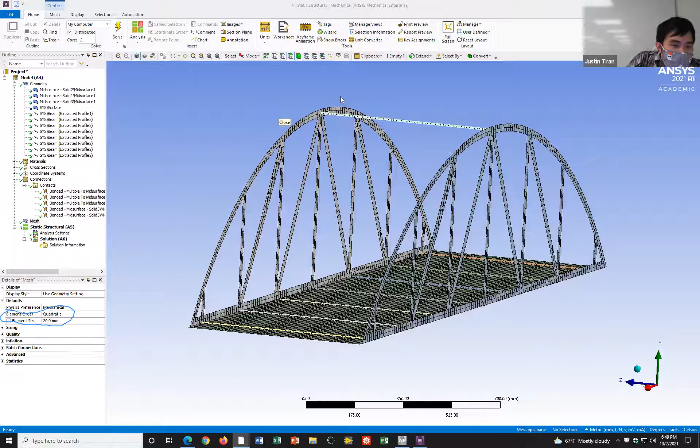When I say add displacement support, do we add connections from the support endpoints? The displacement supports are actually boundary conditions, so those aren't additional contacts. What I mean is you're going to insert a displacement here, and then select these eight places. We're not connecting this to anything new, we're just providing it some additional support.

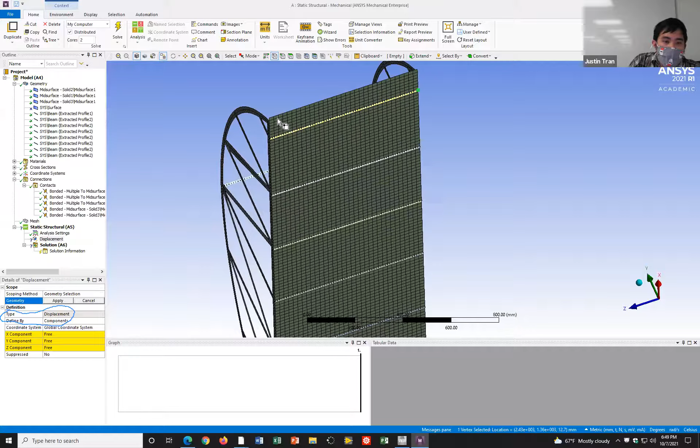You're going to make it so that the y displacement there is 0. Yes. Sorry, just to add on to that, is that just because we would probably expect it to be moving in the other direction?

We do it like that just for stability reasons, so if we fix it in too many places, actually it should be okay. I think the only reason I did that is to give the bridge flexibility, to expand and contract a little bit. But if you actually do it with fixed conditions, it should be fine too. You can either do a fixed support or a displacement, I think they should both give you the same effects.

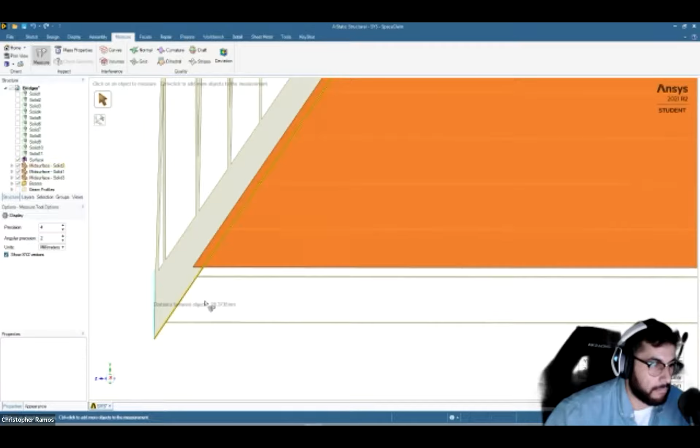Okay, yeah, it should be about 28.37. So the amount that I moved it down is about 28.37, because you don't want to move it too much, since it's going to go below the bridge. We want to make sure it's still within contact of the bridge.

Go ahead and click away for a second just to make sure. Okay, so now let's try moving the road downwards.

I think you moved it down a little bit too much. If you can move it up just a smidge, maybe 0.001 millimeters, I think you should be good.

Yep, perfect. Okay, so let's try the extend one more time. There you go, perfect—wow, that is very finicky. Yeah, it's really finicky. For this, when you're moving the road down, if you move it down too much, it actually moves below everything, and you run into the same problem as before with the beams, where it has nothing to connect to. So you have to do it exactly right.